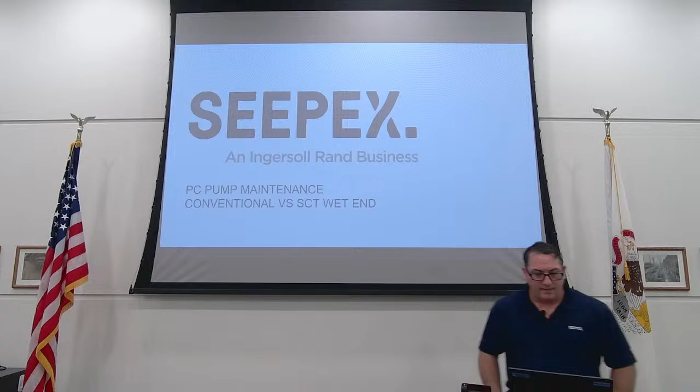So here in the municipal world, what we're going to talk about is PC pump maintenance and some of the maintain-in-place options that are available, some of the new technologies available, specifically regarding the SEEPEX variant. There are several manufacturers out there, but I'm going to go over this SCT model here and give you the differences on a conventional PC pump and the SCT, or smart conveying technology.

Quick show of hands before we get started. Is anybody familiar with progressive cavity style pumps at all, or have any at their plant? Cool, got plans, okay. Just curious. Nice.

So again, we're basically going to go through the PC pump. The pump has a driver or a motor, some means of operating the wet end of the pump. Believe it or not, that can be a gasoline engine, but more commonly and most frequently here in the municipal world, it's going to be a 460, 480 volt motor, three-phase motor, all the way down to a little DC brushed motor, say on a polymer makedown unit.

First and foremost, when you receive a piece of equipment, you're going to familiarize yourself with the O&M manual, specifically the maintenance and lubrication schedules. This is an example here of one of those schedules.

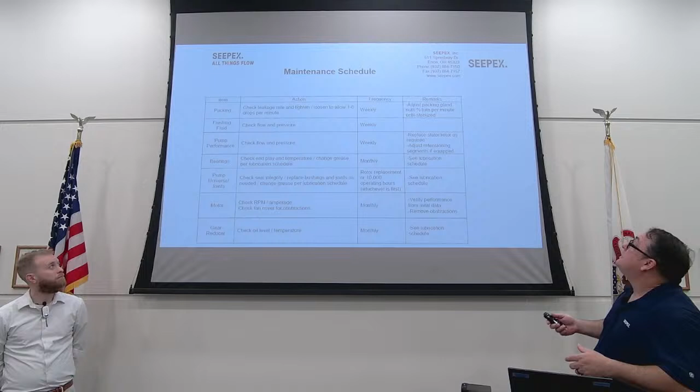Packing is actually designed to drip 1 to 3 times per minute. Otherwise, the shaft is not being lubricated. So if we go and crank the packing down, even on a vertical turbine, to where it doesn't leak at all, depending on the head and the pressure, we may be submitting that shaft to forces like a brake pad, and it's eventually going to wear or polish the shaft beyond reasonable means. There'll be a test on this at the end as well, so make sure you study this.

So, flushing fluid - you may have a plan 53A or B. You may have some type of flush plan on your mechanical seal. On these PC pumps, we use a single mechanical GA seal 90% of the time. We do offer back-to-back, different seal arrangements, different pressures, designed for different viscosities. And you may have a quench fluid to keep those seal faces cool.

For example, if you're pumping something like sodium hypochlorite, 12.5% bleach, you may want to make sure the backside, that stationary seal, is wetted with a quench just to keep it cool during operation. So that quench fluid, whatever it may be, you may need to check the fluid level weekly.

Pump performance: check flow and pressure weekly, replace stator and rotor as required, adjust retensioning segments if required or equipped. Now, this is where we're going to get into the differences between the conventional stator and an adjustable or maintain-in-place, repair-in-place type stator. So keep in mind those can be a little bit different.

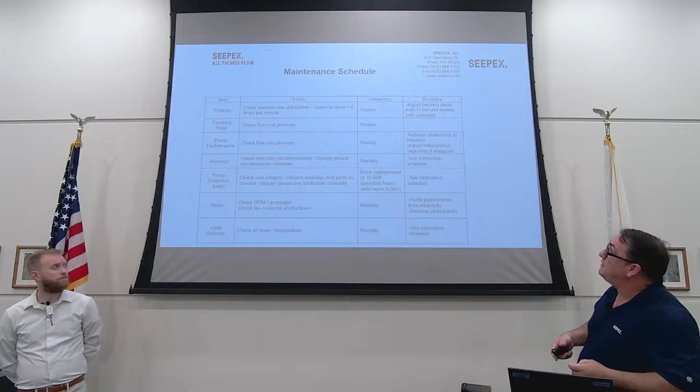Bearings: you may have an NS style pump where you have a coupling in between. It's not close coupled, so it does require alignment, and you're going to have additional bearings for that. If you have a close coupled unit, there's going to be bearings in the electrical motor, inner and outer normally, and a few bearing sets or races inside the gearbox. Other than that, there are no ancillary bearings or bearing frames. That's one of the benefits about the close coupled design—it is what it is, right?

So it could be a C-face flange to flange, and then wet end flange to flange off of the suction casing. So there's no alignment required. You can just drop the pump in place and fire it up.

Universal joints—there's different designs and styles. Most frequently, the cardan joint or pin joint is going to be used. I've seen gear joints, heavy duty cardan, double cardan, such as on a PTO or something like that, or a CV type joint. So we use a standard pin joint, and it should operate the life of the pump. I'm going to get into why we don't break into the joints with this type of technology, because you could be possibly opening yourself up to failure if the joint is not rebuilt correctly.

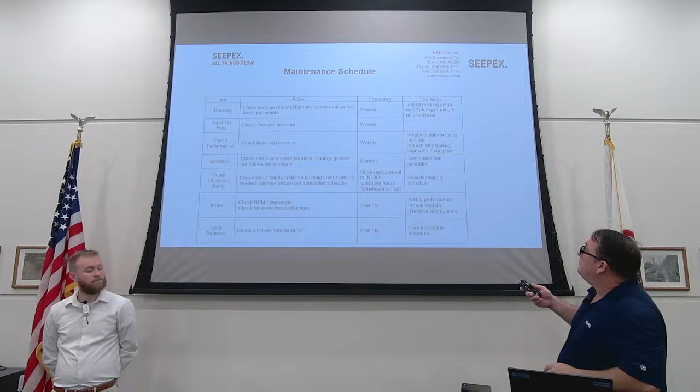So we're just going to say 10,000 hours. We can even warranty that, because as long as the pump's not cavitating, the joint should last the lifetime of the pump. We'll take this apart here shortly and pass it around to show you guys the ease of maintenance. That's the main key of this specific product here, as opposed to having to pull it out horizontally with similar products.

This one you actually bolt apart here and it comes apart this way, so it's a lot easier to work on things. You've got a lot more space. If the engineer didn't design for space in the room you're working in, you don't have to worry about being stuck in a corner or something crazy like that. So you'll see once we get to that point.

Last two here: motor—check RPM, amperage, fan covers for obstructions. That's normal stuff. I get a lot of technical questions from engineers and operators, and they ask how slow can I run this pump. Generally speaking, me being an electrician in a past life, as long as we're running the motor fast enough that the coupled fan can cool the motor—which is generally a 10-to-1 turn down, 60 hertz to 6 hertz—we're fine. If we run below 6 hertz, we may need an externally powered or water cooled jacket on the electric motor. So that's just something to keep in mind there.

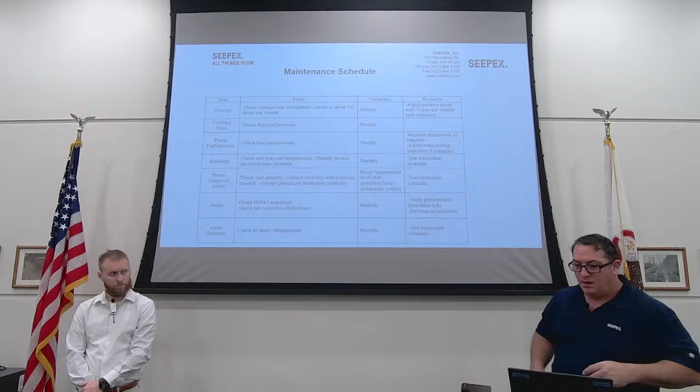When it comes to RPM, one of the inherent features of this pump is the flow curve, which I'll get into here in the next slide or two. If we have a linear flow curve, depending on the head, compared to say a centrifugal pump where that curve just kind of falls off as more pressure is on the discharge side, it's kind of hard to figure out what the flow is without a flow meter. But with this type of technology, if we know the motor RPM and we know the gear ratio, we're going to know within 1% how many gallons a minute, how many gallons per hour that we're actually flowing.

So that is one of the nice features of this technology, this PC pump, conventional or maintain-in-place—they say all PC pumps are metering pumps. That's simply because we know what it's going to flow. It's going to be on that curve no matter what, right? Unless it's totally worn out. So we give it 5% here and there, generally speaking, but it's going to be right on that curve.

So, 100 gallons a minute at 1800 RPM. If we know we're running at, let's say, 30 hertz, 900 RPM, what's our flow? It's going to be half of that, right? So 50 gallons a minute.

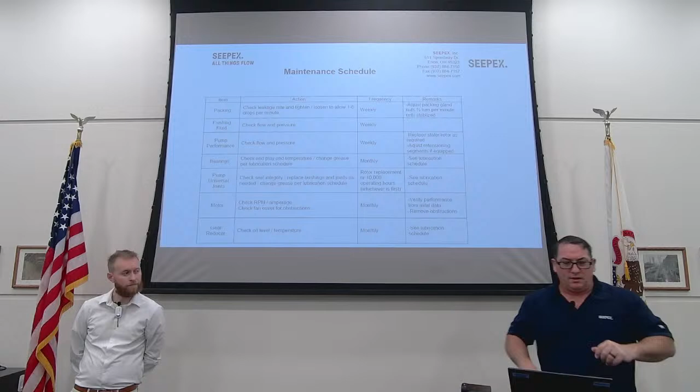You could put a reflective piece of tape on the plug-in shaft where the packing and mechanical seal is, get an IR RPM gauge, and check the RPM. If the pump's running 150 RPM, we should know exactly what we're going to flow. That's one of the nice features, especially if we're feeding chemical, feeding a belt press, and we can pump the cake on the other side too. It's good to know that.

Last but not least, one of the most important things, really the only thing that gets put on the list at least annually, is check the gearbox oil. There's really not a whole lot of maintenance involved with the PC pump, and we've even made it easier with this piece of equipment here. It's the only adjustable pump on the market. But check gearbox oil, check your amperage, check your load, check your flow.

You may have different capacities even though the gearbox is exactly the same. I'm going to get into that right here, it's pretty important. Once we open this up, you'll see how simple this is. It's literally a rotor that's going to rotate on a stator, and as it rotates, it forces the liquid to take the path of least resistance, so it only has one way to go. When we open it up, it'll make a lot more sense.

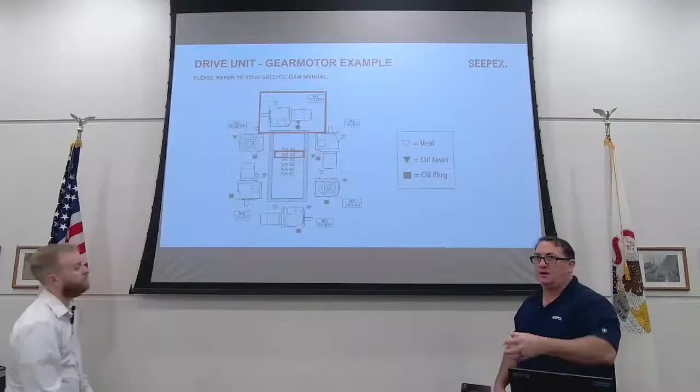You'll see it's literally just a helix that's rotating in like this, making it so the liquid has to go in one direction. It actually gets pulled into one of the cavities, and then it pushes it out the other side of the pump. So we can pump whole strawberries with that technology and not damage them. It's great for polymer, a lot of industrial applications. We use it like soap facilities, for example. Anything that's really viscous or thick, it's specifically made for these kind of applications.

So standard configuration here: we've got a vent on top of the gearbox, that's M1, and then we have a drain. So oil plug, vent, oil level. Notice your oil capacity on this M1 is going to be less than half of the case, right? So if we invert that, say M4, because this pump can run forward or reverse, it can be mounted on the wall vertically or horizontally. It comes with a base plate standard, you can just drop it on the floor and anchor it to the floor. But the PC pump doesn't care how it's orientated.

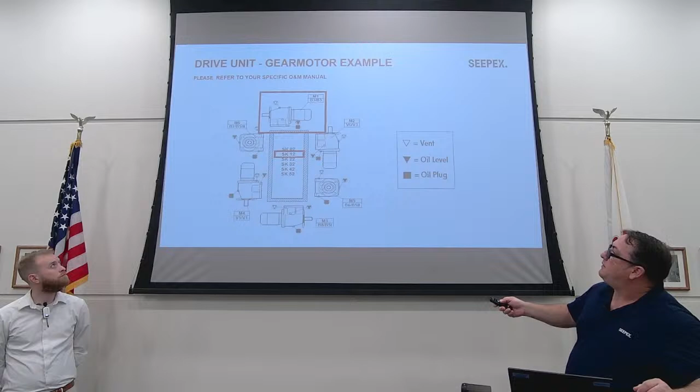We make skids that go onto the walls or whatever, so maybe the gearbox is in M4. Now the vent is going to be moved to the top, and instead of using half, we're going to need enough oil to come all the way up to here, so basically we're trying to wet that ring gear. Everybody has an idea, especially the car guys in here, the ring gear has to be wetted. So as long as we get the pinion and the ring gear, we're good. Now if the pinion is this way, we've got to bring that capacity up to wet those gears there.

What Jason's getting at here is we can configure it basically any way you want. If you've got an existing setup that's goofy and for whatever reason you want to mimic that again, we have no issue configuring it however you would like it to be set up. It's all about how the customer wants it at the end of the day. That's what Jason's trying to show here.

So overall, grease the motor bearings if applicable, replace the gearbox oil, maybe even take samples of gearbox oil every 3 years or every 6,000 hours. Check shaft runout - does everybody know what that means? Basically you have the drive end, then you have the sealing, they call it the lantern or the coupling, and then we have the wet end. The wet end of the pump does the work.

Where the mechanical seal is placed or the packing is on the plug-in shaft, you may have to put a dial indicator on there, and just make sure that shaft doesn't have a lot of play, because especially with the mechanical seal, we want to keep them pretty concentric. We'll allow maybe 0.003 on the indicator for runout - anything beyond that, you're out of tolerance. So we want to make sure we're within tolerance there.

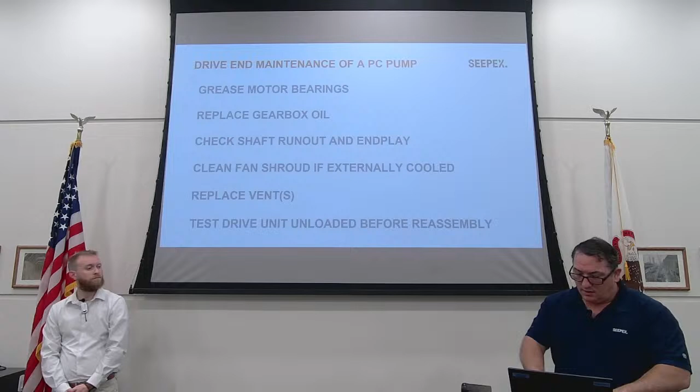Check shaft run out and clean the fan shroud. Obviously, if it's packed with trash, fibers, whatever is flying around, the motor can't be efficiently cooled.

Replace the vents. We saw the vents on the gearbox. It's basically a little check valve, a ball check with a spring. Believe it or not, if you haven't run the pump more than its rated capacity, the gear oil never really gets warm, and the ball check will actually stick. So when we change our oil, let's at least check the vent or replace it.

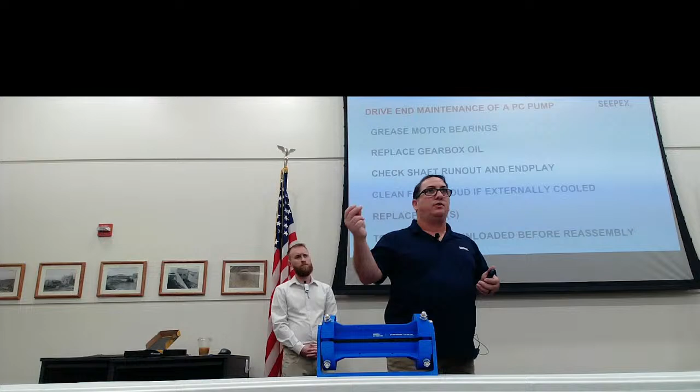So to mitigate that, we have several different options. We can connect this to SCADA. We can look at a downstream flow meter, turn it on - if we don't see flow in, say, 5 seconds, we shut it off. If we're doing a suction lift, how long does it take to pull, say, 28 feet? Let's give it 20 seconds or 40 seconds. If we don't see flow in 40 seconds, we shut it off. So that's one way to do it.

However, flow meters are very expensive, and some plants don't have it in the budget. And why do you need a flow meter for a WAS or TWAS pump, right? So what we'll do is, for an adder, we'll drill and put a PT100, or a simple 2-wire or 3-wire or 4-to-20 sensor, NTC, and we'll measure some temperature.

So we'll take a delta - we'll say ambient temperature today is 60. What's the hottest it's ever been in Peoria? Say 110. Okay, so we know the elastomer melts at 270, so let's set it about 150. So when this comes up to about 150, it shuts off. It basically just has a little contact - you can bring that right back to the variable frequency drive, or back to SCADA for an alarm. So there's different ways to mitigate the run dry.

There's best practices that also need to be followed. Like we don't want to lift aqueous ammonia, sodium hypochlorite, something that off gases. But yeah, if you're just using this for a sludge pump, centrifuge feed, or belt press feed, it's a good technology for that. And it's flooded suction, so we wouldn't have to worry about that.

Now, if we're pulling a digester down every couple of years to clean it out, we need to be aware that once it gets down to a certain level, let's keep an eye on it. I've even seen the plant do this, giant pump, keep his hand on it. It starts feeling warm, shut it off. So yeah, good point.

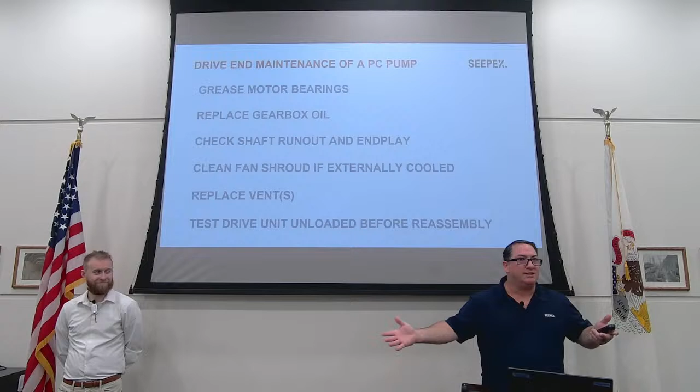Yeah, I worked for City of Westminster in Colorado. Started out as a utility, digging ditches. Went over to the raw water side and made it to plant electrician, which is city electrician basically. Anything that the utility didn't cover, we covered, 4160 and below, which included generator checks, plant upgrades, MCC upgrades. We went from radio to fiber, I was involved in that. Went over to the wastewater side after that. Got to learn about PC pumps, belt presses, and the bugs and all the chemistry on that side of it. So yeah, I've got a little bit of a diverse background. Started out in plastics, but we can talk about that some other day.

But no, this is great stuff, and it's very important. So until 2000, 2001, when I got into water and wastewater, I was in plastics. It was a fun job, but it wasn't important. Water is very, very important, right? So that makes you want to get up in the morning and go do a great job because people depend on you.

Gets me excited. So here's the internal workings of a standard PC pump, not just this brand, but it's pretty common across all brands. You've got a drive, there is no motor here, but you do have a gearbox. There's a splash ring as we work forward. Basically, if this wetted area packing gives out, it's not going to spray into that lip seal, and that helps mitigate damage if there was a failure.

So we've got our drive end, we've got our coupling, which SEEPEX calls the lantern, and that houses the seal, mechanical seal, packing, whatever it may be. This is not an NS pump, it's direct coupled, so this is coupled to here, and the casing is coupled directly to the wet end. In the casing area, again, this can be influent or effluent, suction, discharge. The pump can run either way.

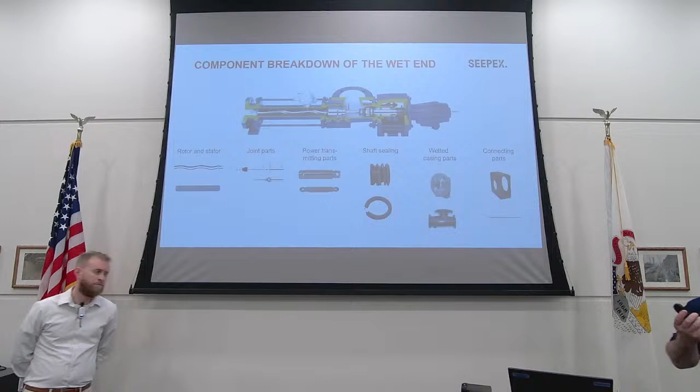There are so many different configurations, that's why you can't just call us, or even another manufacturer, and say I need this size, because we pump everything. Yogurt, water, crude oil, chickens, you name it, we pump it. So this can be stainless steel, it may be ductile, it may be API, it may be all poly, maybe all plastic, I've seen that. Stators, I've seen solid stainless steel stators, no elastomer at all, pumping peanut butter. So ductile, Viton, the list goes on and on.

Paint configurations, macropoxies, it goes on and on because it's made for a certain environment. So municipal, and this side of the world, it's pretty awesome, right? Because we only have a couple things. When we pump ferric, that's going to be a pretty good one, we're going to make sure our materials are correct. But sludge, overall, polymer, piece of cake.

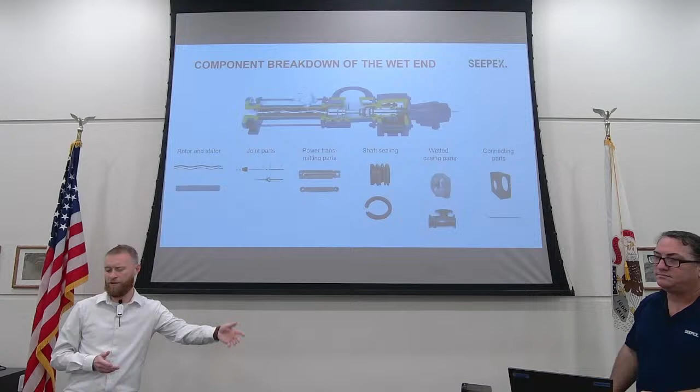Yeah, this thing excels very highly in the municipal wastewater market because the other stuff that it's meant to pump is, how do I say it, the stuff it's doing in the municipal wastewater world is peanuts, no pun intended, nowhere near compared to the aggressive stuff it's doing on the industrial side. This thing works really well. Like I was talking about earlier, it's a very complex unit, but it's a very simple setup.

This is the rotor I was talking about, and all it does is rotate on that rubber part. As it rotates, it forces the liquid the way it has to go. All these parts here, that's it.

There's no crazy hidden parts, very simple. Just to allude to where we're getting into, we're building it up, letting everybody know there's different pump configurations and different applications for these pumps. You see the construction of this pump, it has some tie rods, and then we have a solid stator here. It's basically a pipe tube, knurled, machined edges, and elastomer that has been bonded or extruded to the inside of it.

We'll change the camera here in a second, but there is a rotor and stator, both sides there.

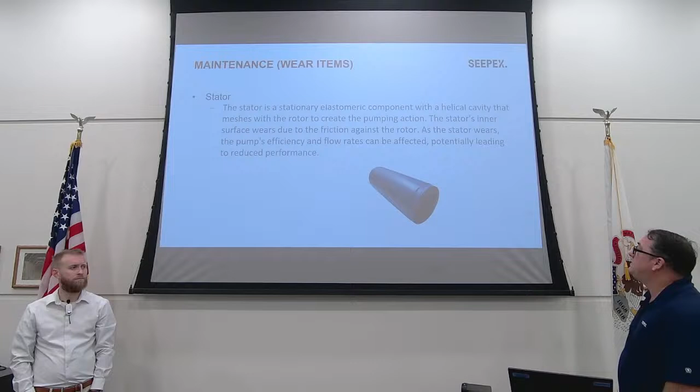So next, just going into this, if this piece fails, it's pretty heavy, it's kind of expensive. It can't necessarily be recycled, because it's a piece of steel, and you got to get the rubber out of it. So there's some things to think about when we talk about the stator.

Rotors, if you do have a catastrophic failure, one thing that I don't think a lot of plants know about is we can send you an entire assembled unit. Say there was a construction project, they dumped a bunch of concrete down the hopper or whatever it may be, and it tore the pump up. We'll work with you and pre-assemble what we can so you can drop it in place, within a half hour to an hour, and be back up and running.

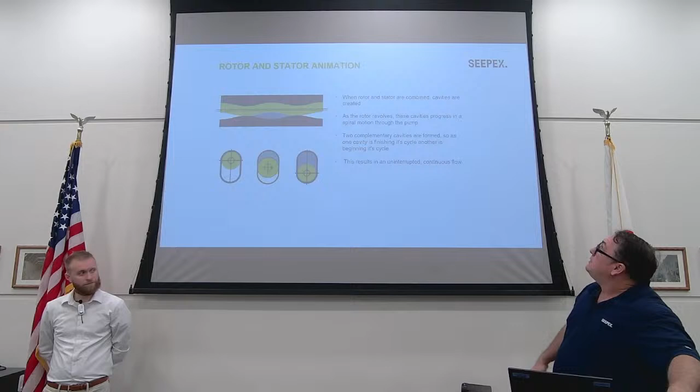So rotor stator geometry and animation. I like animations, I put a couple in here. It helps me relay the message of what is happening inside this pump. As one cavity is opening, the other one is closing, so that provides laminar flow. We don't need any check valves per se, or pulsation dampeners.

So a little micrometering pump that microdoses, there's different technologies, maybe a hose pump or something. If something happens with that, what happens to the chemical? It could fall on the floor because the hose leaks, and then you have these check valves and all this other stuff. This pump will pump laminar, pulsation free to an extent, 2,200 gallons a minute down to 0.53 gallons per hour, up to 700 psi. So there's some good applications.

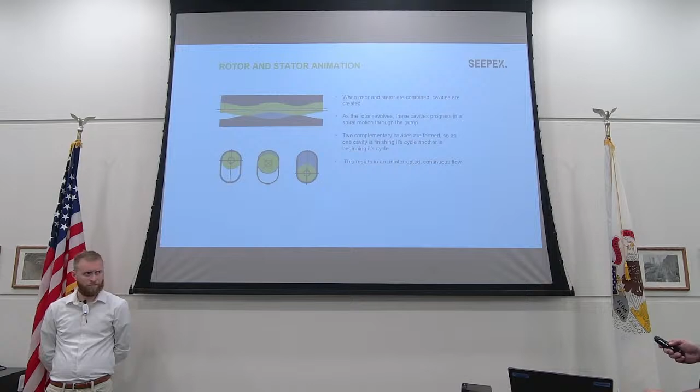Uninterrupted continuous flow here, single helix rotor, double helix stator. There's our cavity, and as it turns, that cavity will actually stay open throughout this 360-degree rotation.

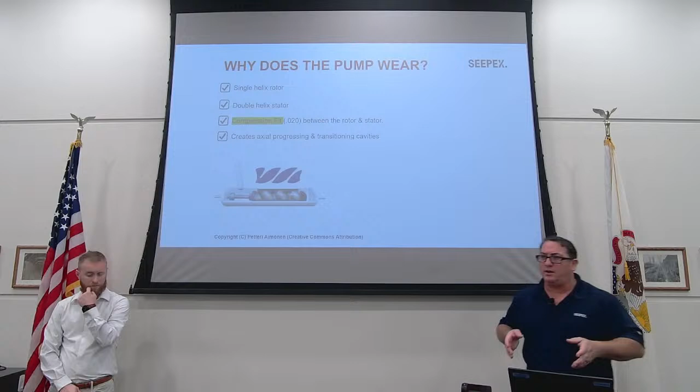Compression fit. We require slightly higher torque to get our pump up and running because we use a tighter fit. So if you take one PC pump that has a 7.5 horsepower motor, we're recommending a 10 horsepower motor. One reason is we want enough power, more than enough power. We don't want to be right on the edge, and we don't want VFD problems or tripping breakers.

Another thing is the pumps are a little bit tighter, not by much, 20 thousandths rotor to stator, generally speaking 15, 18. So 3 to 5 thousandths tighter, but our pump will last much longer now that we made it a little bit tighter. And we can handle higher pressures with less stages. That is a single stage pump, stages meaning a full set of cavities, centrifugally speaking, if you put them all together.

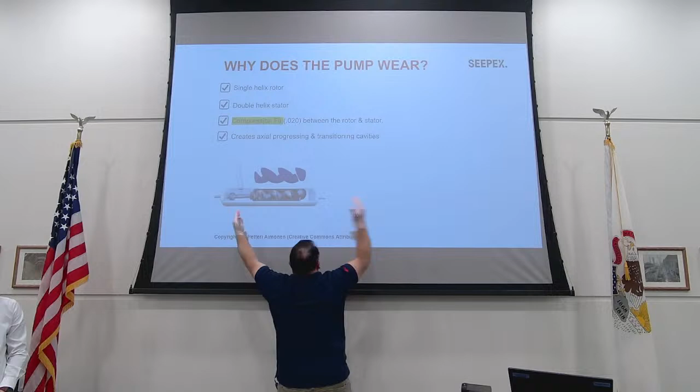Single stage may be this much and it's good for 80 psi or 100 psi. Two stage, you just make it longer, so now you have twice as many sealing lines that can hold that pressure back.

I think what we'll do... jumping jacks? It is Friday. We'll look at this piece here and talk about the difference between the standard and the conventional. I think I'm jumping ahead of myself here real quick.

So we talked about seals, here we go. Conventional pump maintenance: the conventional pump requires a suction discharge pipework to be removed. If this is down in a pit, that can be a pain. Maybe you only have one maintenance guy today and this pump wore out and it can't wait till tomorrow. One guy is going to have to disconnect all this pipe work, and that can be heavy. It's going to take some time. It's an arduous job, could take a couple hours or a couple days.

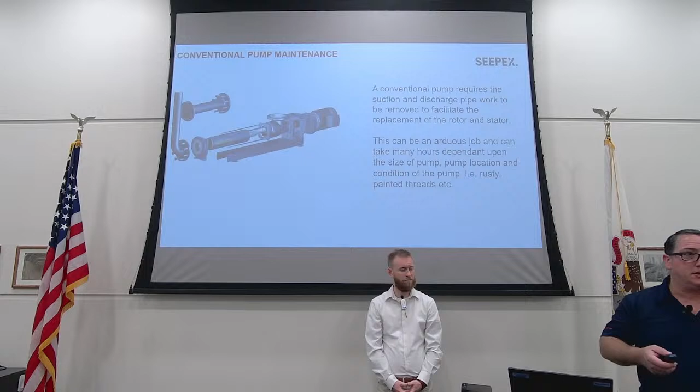This pump I can rebuild in under an hour, any size, one guy. And just for the stator, without pulling a snap ring to get the rotor out, all I need is an adjustable wrench. That's pretty cool. I don't have to disconnect any pipe work.

Jason actually drove up a couple months ago from Ohio and helped me install a pump along I-80 in Oglesby in under 3 hours. Took the old pump out, put the new pump in, up and running. Entire pump replacement in 3 hours. And me and him, I'm not a technician, as you guys can tell. He knows a thing or two about it, but if we could figure it out that quick, you guys can probably do it a lot faster than we can.

So something to think about: this is an adjustable PC pump. There are other technologies out there where you take a spacer out, or you have multiple bolts and stuff. This thing can be adjusted on the fly.

So if we look up and we're at 68 gallons a minute and we need to be at 75 or 85 gallons a minute, basically you're going to go flat. Make sure we go flat all the way around and watch that flow meter come right back up. Now, if you got a younger guy and he's real go-getter, and he's out there with the ratcheting wrench, he's got the big 24 inch and he's tightening that sucker down, you'll see the flow go up and then the flow starts to come back down. Why is that? Any guesses?

It could possibly slow the rotation. Say we got a 25 horsepower motor with a 16:1 ratio, right? There you go. So the cavities inside the pump...

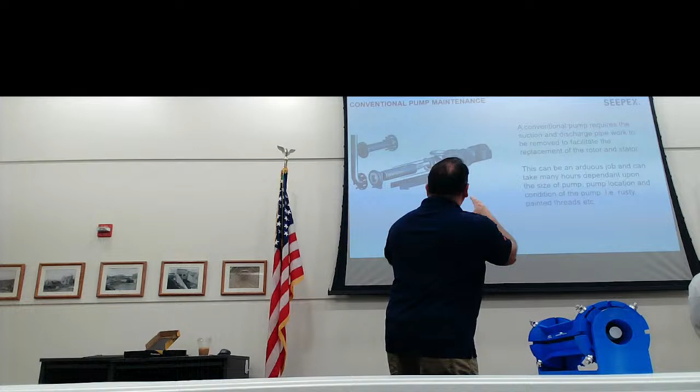I'm gonna break this open for you real quick. We said we can guarantee flow within about 1%. That's pretty good. So this can actually be over tightened.

And that's why one of the things that we want to do when we start up and commission our brand new SCT pump is take amp draw on the motor, make sure that we got a baseline, kind of figure out flow. So these, you keep these for the life of the pump. They don't go anywhere.

This is the only part that needs to be replaced. This part can be thrown in the landfill or it can be recycled. I highly recommend we recycle it. This part is a third the weight of a big stator, just no steel, right? So one guy can carry a big stator around downstairs and swap them out.

So there's your cavities. And as we compress, those cavity sizes are lower or diminished. So now we can't convey as much. So what do we do if we over tighten it? We could probably speed it up to get our flow, but basically we just over tightened it.

So how do we know? Well, it's not rocket science. So this right here can be tightened down. This is my 3D printed model here. You see how this is sitting flush? That means I'm out of adjustment. I probably want to order some parts because I've only got a couple weeks, couple months, couple years, and it's no good.

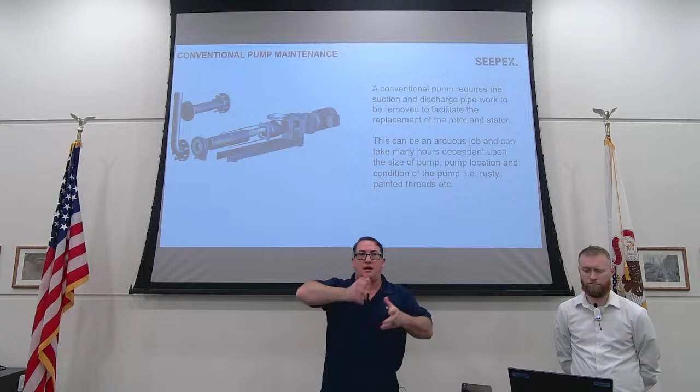You can flip the stators either way, you can gain more life that way. If you saw cavitation or dry running, that's going to happen on the influent side. That's where we're going to run out of material first. So yeah, flip that around. There you go, you get your flow back, at least enough to make it through. So yeah, it's pretty cool.

Technology is evolving, you'll see different manufacturers. We've all got a maintain-or-repair-in-place technology. I'm a big fan of it. I just want everybody to know about it.

If you do have rotary lobes or other technologies out there, and maybe you've got a poor primary side of the plant, getting a lot of hair, a lot of fibers wrapped around those mechanical seals, or you're just tired of working on them, there are other technologies out there, right? Yep.

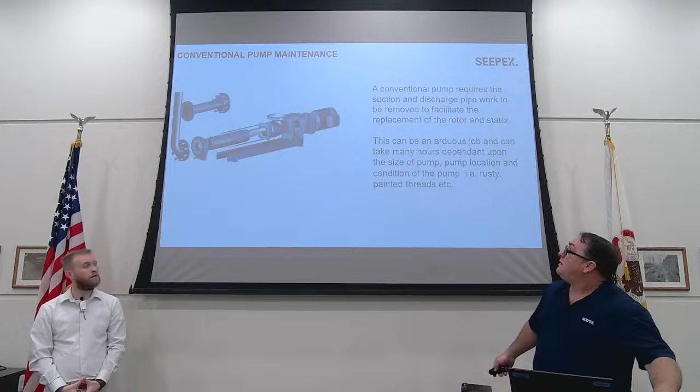Okay. Oh, so maybe we should trim that every once in a while. You could trim a lot of things.

So I helped a lot of the geeks out on the SCADA side, so you can trend the 4 to 20 part of it. I mean, you know. Why are you calling me that? I'm right here. So we used to call them, so all of us outsiders, we were W, or Whiskey 1, Whiskey 3, and all our SCADA guys were Geek 1, Geek 2, Geek 3. So just an inside thing.

So yeah, you can trend. So in short, when should you adjust it? So a VFD is going to be programmed to a maximum, right? 60 hertz, 70 hertz, maybe even 90 hertz. Some of these premium efficiency motors are designed for almost 4,000 RPM. They're designed for a VFD to run at 90 hertz, right? There's a whole explanation, I can explain all that stuff at a different time.

So yeah, if we know this pump has been running, or it takes 6 hours to transfer, or yeah, I've never heard the pump run like that. Do-do-do-do-do-do, it's usually nice and quiet, and do-do-do-do, so I guess it's up to each plant and each application.

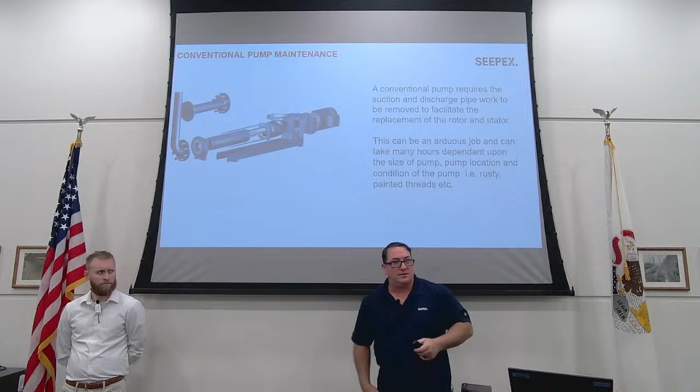And I would say also, if you're noticing it's doing the same flow, but it's consistently running at higher hertz now, the trend will probably tell you something as well, right? So trend the hertz, or the frequency, the 4 to 20 signal, the flow.

Yeah, sound, yeah, I mean there's several different things you could trend. I mean you could even trend the RPM on a VFD, get the feedback off of an analog output and get the RPM. It may say 1750, and oh, we've never seen it run over 900, and now it's running at 1235 or something. So yeah, it's pretty cool stuff out there.

Some flow meters, and even overpressure devices such as Ashcroft and Onyx, and isolation rings and stuff, they have built-in technologies as well. But I'm probably going off on a tangent.

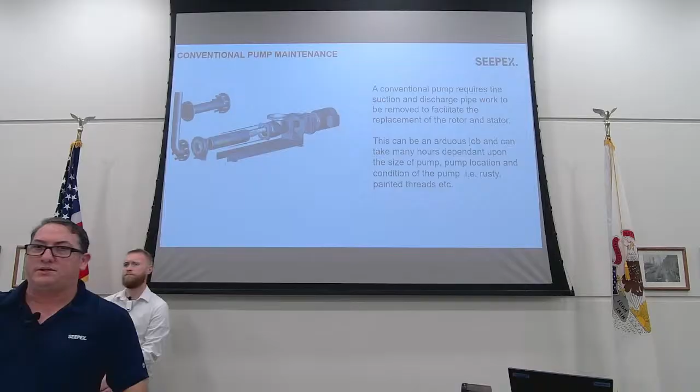Yes sir, so I guess the way this looks, you can do all that maintenance without having to remove it. Absolutely. So that pump right there, those two end adapters or casings, one would be a pressure branch and one would be a suction branch. Those don't move. The only thing we have to really touch or adjust is these 4 segments, the 2 halves, and the hardware.

So yeah, the rest of that part of the pump is maintenance free. The question was if you can replace the stator portion at the plant, or if you have to take it out and do the work elsewhere. When we did the replacement in Oglesby, we did all the work right there on the shop floor, right where the pump was installed. There were 2 pumps there, and we were able to do all the work in that little corner. So you can do just about anything until you get into the bigger units, depending on what needs to be done.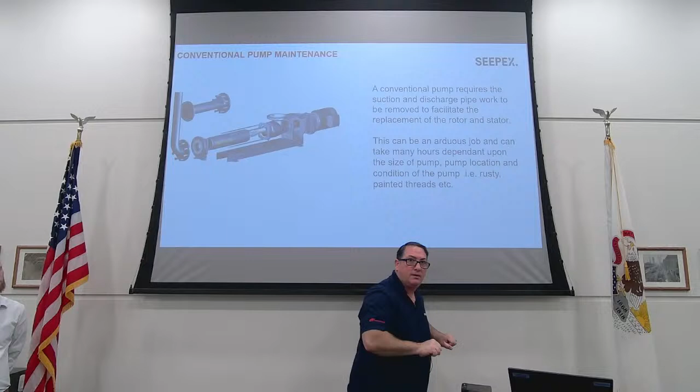Traditionally, if that stator is 30 inches long, you're gonna need 30 inches to get that off the rotor, right? With this technology, you don't need that length. It basically comes apart as an exploded view, so working around that piece of machinery, you only need enough room to remove the segment. No longer do you need a cheater bar and some of these other tools to work on the older conventional style PC pump. Depending on your safety protocol, it might require certain tools. Everybody's different, but for the most part, everything can be done right then and there. Just depends on whether you can pick up a certain amount of weight, right? Yep, so it just all depends. Yeah, ergonomics, that's a good point.

A lot of plants don't want an operator lifting more than 50 pounds, or even a maintenance guy more than 75 pounds. A big stator, 300, 500, 800 gallons a minute, you're not gonna be able to pick that up. With the new technology, a 500 gallon a minute stator half is 38 pounds, and it's a good size. It's just a piece of Buna or Viton, just depends. But about 40 pounds, that's pretty nice.

Good question, though. I have a question. So at our plant, we have a Netzsch. We ran it with a valve closed, so it broke. But it would pump for a while, though the volume went down. Sure, so I still don't... if you were running that pump and had a valve closed, it sucked on the feed side. What are you gonna damage on this?

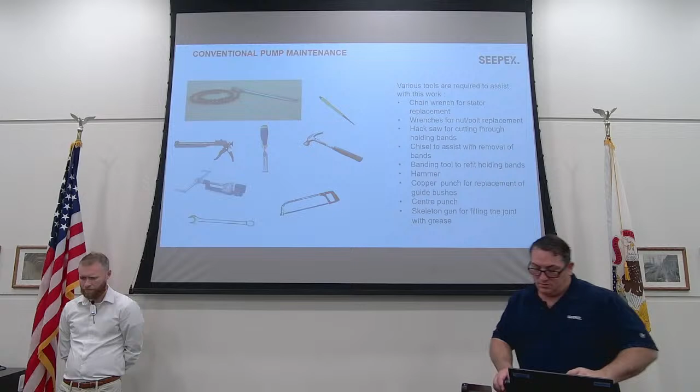You could possibly damage something with this pump, but part of the whole commissioning is that a lot of our guys are electrically inclined. We'll program the VFD or set the heaters in the soft starter right at NEC level. So we're not going to throw 50 amps at a 20 amp motor, right? So when I start that pump up, I highly recommend that once you get this pump repaired, make sure it will shut down on overcurrent or inrush spike. That will actually catch it, if this pump's designed for 200 PSI and it hits 350 PSI, I guarantee your amperage on the driver or motor starter is going up. So there's a correlation for that torque, it's going to show up in horsepower or amps, right? So that's the first thing that I would do.

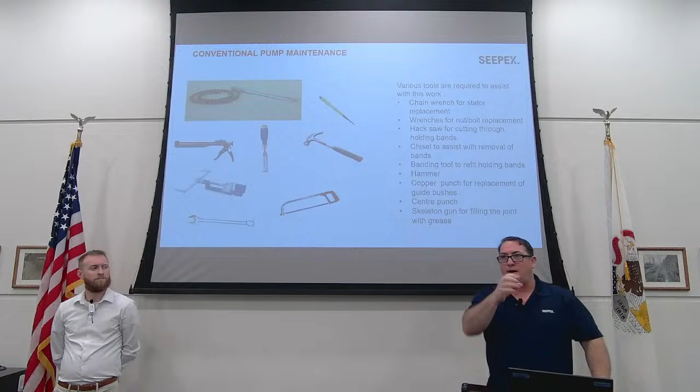Will this one handle more pressure, higher capabilities? Yes. I don't know if I have a picture, but does the Netzsch have a maintain-in-place design? I don't know. Okay, so Netzsch has an FSIP type pump, but it uses a 2-piece coupling rod with an Allen bolt. So essentially they've taken my part and made it this big, so it probably snapped or bound up, or something happened, right? Mine is full size - all I did was slide a snap ring over it. So nothing in this pump was cut in half other than the stators. We don't sacrifice strength and durability for ease of maintenance like some other manufacturers do, if that answers your question.

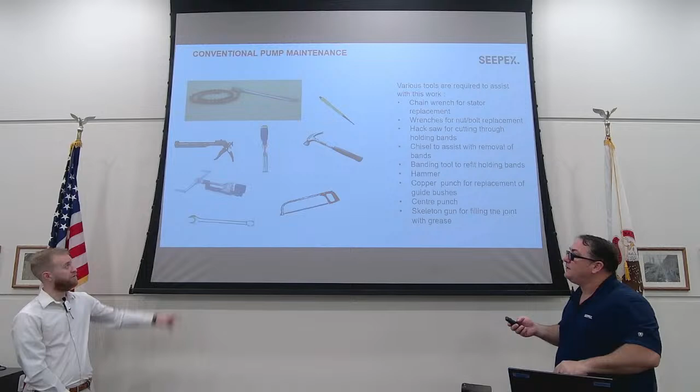You can get most of these tools from NAPA as well. That's why I recommend going with this setup. So yeah, it can be a pain.

I'm just going to step back here. You can see you're going to need a lifting apparatus depending on the size of the pump. I'm not going to go into depth of this whole thing, but you have to slide this off - oh my gosh, it could take a forklift, it could take a giant come along depending on how many stages. It could be a 4-stage, 500 PSI pump. How long is that rotor? Four times, right? So it's going to be a bear to get on and get off.

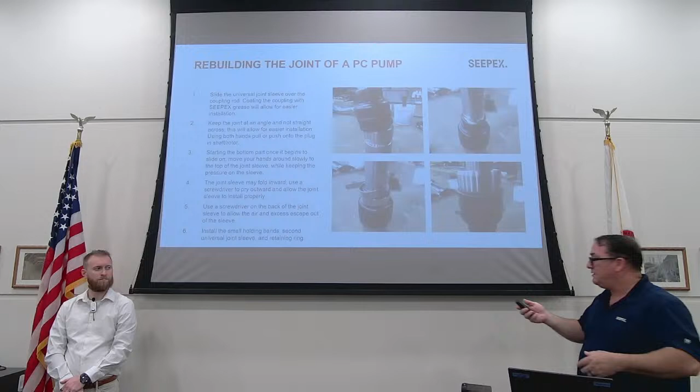Joints, here we go - these are a little complicated. A CV joint in the car, AutoZone doesn't want us rebuilding them. They send you the whole CV joint, and you got to take the whole thing off and put the whole new CV joint, pre-manufactured, pre-assembled, into your car, because it takes a little bit of knowledge and training. Yeah, we can do it - I did it, you guys can do it. But why break into that when you can use that technology if you don't have to? They should last the life of the pump.

So yeah, the joint has to be dismantled. You have to have a means of rebuilding it. It can be a pain.

So the maintain-in-place concept, which we talked about, the model that we're passing around, it's ease of maintenance. We're trying to meet stringent specifications for how much can somebody lift, how much does somebody need to move, or how many operators or maintenance staff does it take to rebuild something. How long does it take to rebuild something? So we're cutting down the time. How much does it cost to rebuild something? We're cutting down how much it costs - not just the return on investment overall, many years and hours to add up.

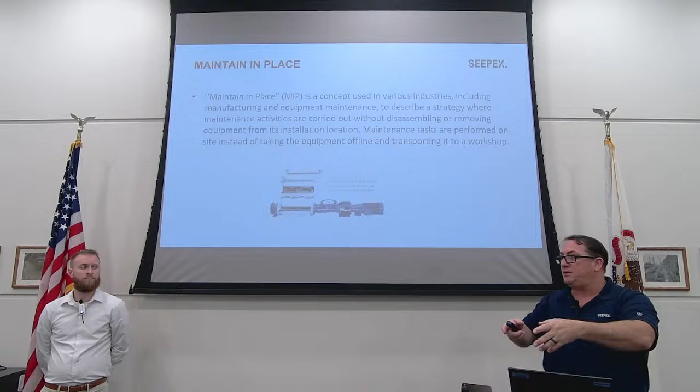We're talking about a two-piece piece of rubber compared to a stator bonded tube, so the cost and all that stuff, the lead time. There are different stages and pressures - 500 and something gallons a minute, single stage is 60, double stage is 120 PSI. So there are limitations to this style.

We have other technologies as well, so definitely reach out if you're looking at something. SCT does not require rebuilding the joints - how important is that? I put it in every slide from now on, again and again and again.

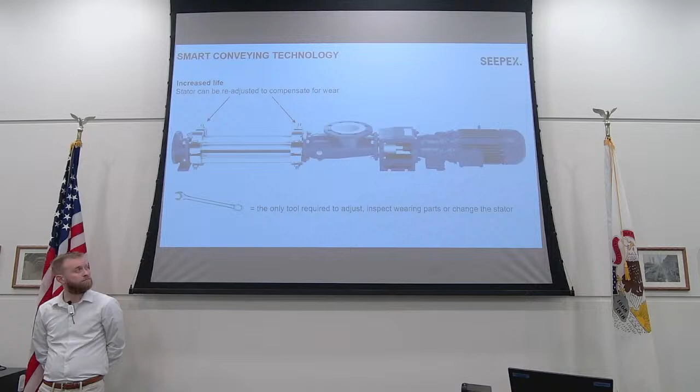Smart conveying technology - if you have ragging issues, open the pump up. It takes seconds. Open the pump up, what's wrong? Nothing wrong in there. Put it back together, it's got to be something else. Pretty cool stuff. It says you need a certain box end wrench - again, send the guy downstairs with an adjustable, he'll be just fine. From NAPA.

Environmentally friendly, less waste produced. Only the stator halves are replaced when worn. Easily recycled. Pretty cool stuff.

I know we talked about a lot here, but this is a very simple unit. It's very complex in the way it operates, but it's very simple at the same time. If you have stuff you're struggling with pumping or other pieces of equipment you're not happy with, this excels in the municipal wastewater market. It really does. And there's several technologies out there - we're not saying this is the one end-all be-all. This is just one of the things that we chose to present on today for you because we love it a lot, and we might be biased a little bit.

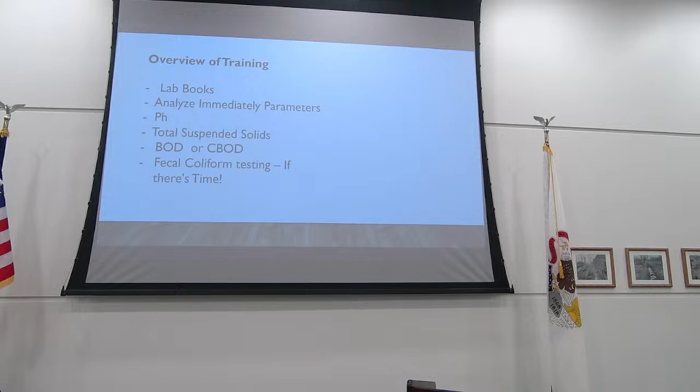There we go. Okay, so you'd be asked to have lab books, or at least prove that your equipment is saving the info that you need to show that you've calibrated, like your pH meters, DO meters, or anything else like that.

So we're going to look at analyze-immediately parameters. If anybody knows what those are, hopefully you do know what those are. If you don't, your next lab audit you'll probably learn what they are. pH we'll go over quickly because pretty much everybody knows how to do pH. The main things we'll really want to hit on are TSS and BOD - those are the major ones I have questions on. We probably won't get to fecal coliforms, but if we do, we'll look at that as well.

So lab books, the big thing is make sure they're solid bound. You don't want your lab books where you can have removable pages, because if I'm coming in there and looking, you could completely remove a page and change that calibration data. So they want to see it as hard bound. You can buy, what we had, like ledger books for keeping, auditing and stuff like that - those are great books for keeping.

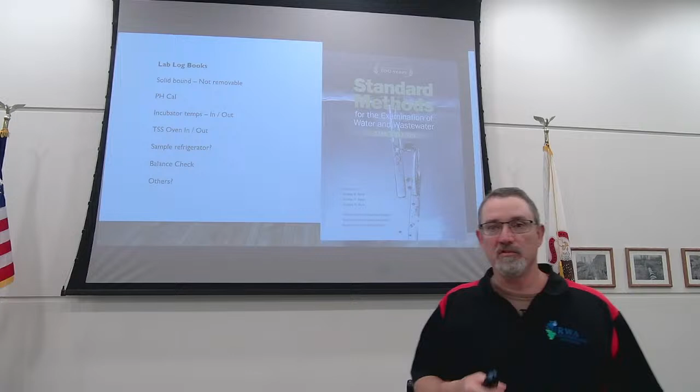For your lab books, some of the items that we'd put in there - when you did a pH calibration, incubator temps for BOD, TSS oven temperatures, sample refrigerator if you're keeping samples for any length of time, your balance check. You should be looking at this when you do TSS - your balance check should have check weights to make sure that your balance is keeping the calibration.

And does anybody have any other things that they keep in their lab book? Those are most of the ones that we did.

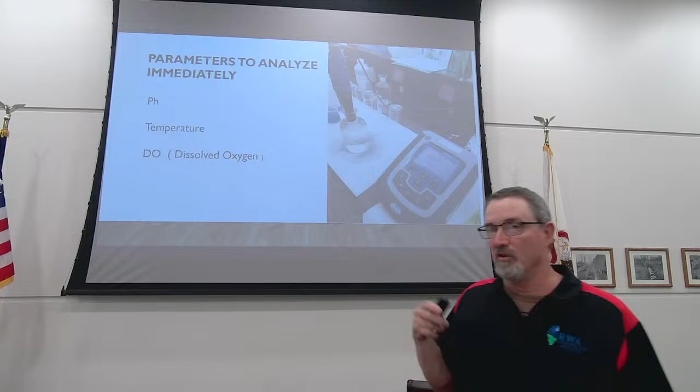So these are your analyze-immediately parameters. Hopefully, if you're from larger labs, you know it goes into more like class 3 or 4 plants where they're shipping all their samples out. What's happening is a lot of the pH and DO are being done by contract labs.

You're really supposed to be analyzing temperature, pH, and DO within 15 minutes. If you're getting a lab or IEPA inspection, most auditors now require at least a DO meter on site to check the DO. Kent and I have seen a ton of violations for DO, and if they had a DO meter on site, it probably would have been avoided.

I just visited a facility yesterday that's under a violation notice for DO, and it was literally that they were taking the sample in the wrong spot. Kent and I have seen that multiple times.

So if we calibrated on 4 and 10, the 7 for our lab was designated as having to be plus or minus 0.05 to be an acceptable calibration. Also, look at the slope on your meter and see what the manufacturer allows for the change in slope. You should be calibrating before each certified reportable number.

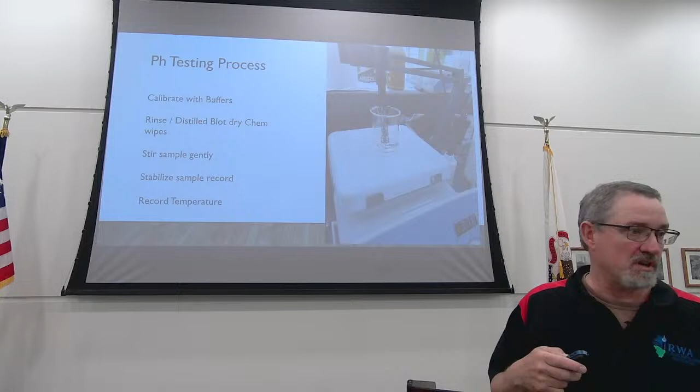I'm not going to go through pH too quickly unless somebody's got a question on pH calibration. I've got a bunch of cards here. If anybody needs help with any of these items, feel free to reach out to Kent or myself, and I can certainly help you with that.

The one thing I'll point out is I've seen a lot of people get all their filters from USA Blue Book, and those filters, in my opinion, are not the best. The way I can tell is a lot of people using them do their blank on the TSS, basically running 60 mLs of distilled water, hopefully at least. They're getting a lot of variation on these filters, and I see a lot of people saying, how am I getting a negative number on that? Those filters are just very flimsy and not well constructed.

They also have what's called a Whatman filter, which is quite a bit better in my opinion. That's the one we used for 35 years in my plant. We didn't get anything from USA Blue Book, we got it all from Fisher Scientific, but it was the same Whatman filters. The Whatman filters are quite a bit better. I don't see nearly the variation on the weights that I do with the Blue Book filters.

So for the weighing balance, obviously we want it to have a hood on it, because air currents can hugely impact results. I had one guy with the same issue, asking why his filters were getting such variation. He had a balance with side sliding doors, and he was keeping those doors open while zeroing his balance. Air currents, and his furnace was kicking on, you could feel the air current in the room fluctuating all over the place. I told him you're supposed to keep those sliding doors closed, which we probably all take for granted.

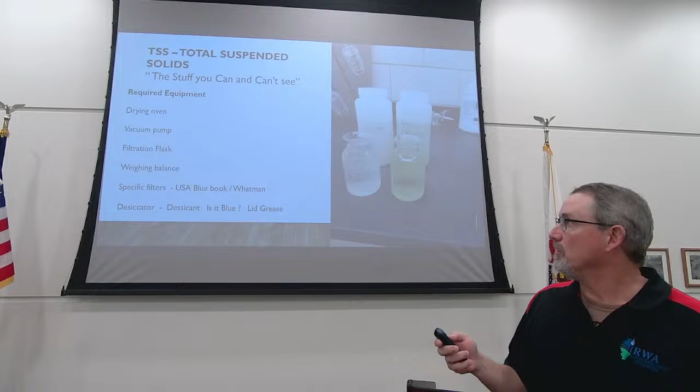Vacuum pump, filtration flask - there's 100 different setups I've seen, especially since I've been out here. The biggest thing with filtration equipment is being able to get a large enough sample through the filter, so there's modifications and all different sizes of filters you can get. There's down to like 25 millimeter filters, 47 millimeter, up to like 120 something, and they can all be used for TSS filtration.

So for procedure, I'm gonna kind of whip through this because I feel like most of you probably know how to do it, since you're here. The one thing I will touch on is sample size. That's one of the things a lot of people err on - especially for effluent, they're using way too small a sample size.

Like what size sample do you guys run for effluent? 100? Yeah, so technically, and we'll get into this in the calculation part, if you're running 100 mLs, the lowest number you can report down to is 10. So you really need to bump that up to, in my opinion, like a 500 ml sample.

So that's just by the way the method is set up, and all this goes back to standard methods. If you want to fall asleep at night, there's a book called Standard Methods for the Examination of Water and Wastewater. Everybody's probably seen that, nobody reads it. All this stuff's in there.

And whenever something comes up, like there was something on BOD I'll touch on, I go to standard methods and say, well, where is it in standard methods? If it isn't in standard methods, then it's up to interpretation of what I feel like we need to do. If it's in standard methods, then it has to be done, okay? Anything outside of standard methods?

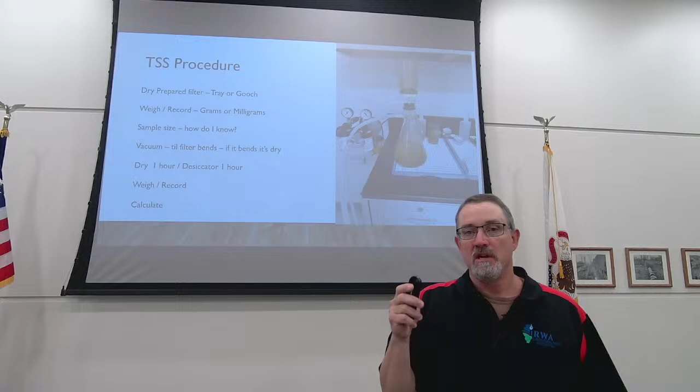Eddie and I were talking about this. In standard methods, you're supposed to get at least 1.0 milligrams of weight. So if you're weighing in grams, it would be 0.0010 weight on that. If you aren't achieving that, then you have to go to what the default is of the multiplier, okay? So if they're using 500 and they don't get 0.0010 residue on there, then they would report that sample as less than 2.0.

And if you look at the results you get from PACE very regularly, BOD - and I'll explain detection limits in BOD and TSS a little more - I very regularly get results from PACE that say for BOD less than 4, or for TSS, less than 4. And we can do the math for both of those.

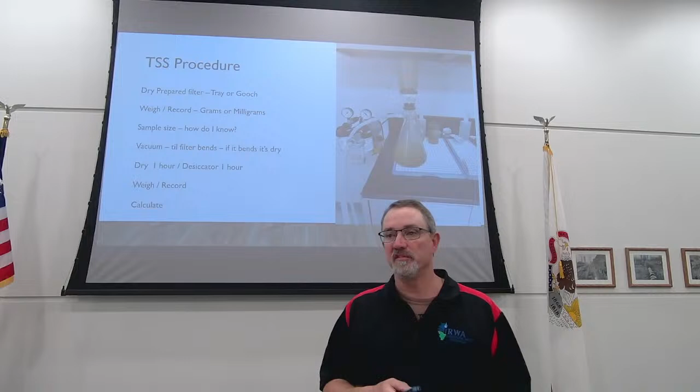But so that's technically how you're supposed to report that, and the majority of labs out here are not doing that. Like I said, the only reason I know this is because we have lab audits every 2 years, and they'd say, well, what's your result? And I'd report 0.5 milligrams there.

Well, you can't do that. Even if you're running 1,000 mLs through the filter and you don't get 1 milligram, you have to report that as less than 1. Nobody's going to run 1,000 mLs probably through a filter, because it's going to take you quite a while, and nobody wants to hold a graduated cylinder that's yay big.

So, anybody else have any questions on that? Because I see that all the time - people are running 100 and they're getting a negative number, and they'd say, well, how can I get a negative number? It's because...

So let me see where we're at here just so I don't jump ahead too much.

Okay, so this is where we're at - determining sample size. Like I said, you want to get at least 0.0010 grams or 1.0 milligrams if you happen to weigh in milligrams, which almost nobody does out here.

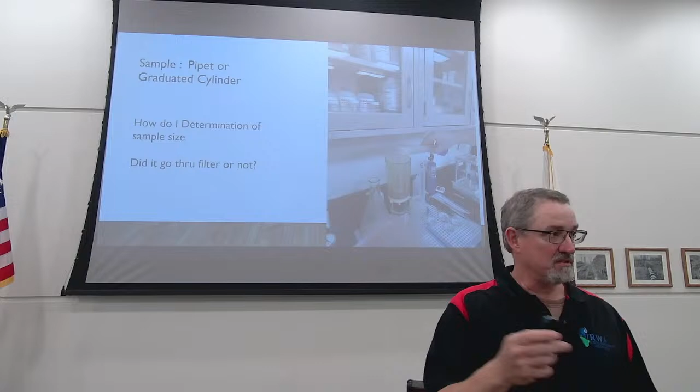So if I'm running 100, the multiplier to get to liters is what? 10, right? 100 times 10 is 1,000. We're weighing in milligrams per liter. So if we use only 100, it's only accurate down to 10 milligrams.

Most people, because they have the 85% removal rule in there, want to get down lower than 10. I would recommend at least getting down to 4. So if we're getting down to 4, we'd be using 250 mLs.

If anybody's confused on this, just slow me down. Ask questions, don't be afraid to ask. Because almost none of the wastewater labs I've seen know anything about detection limits. If you've got questions after this and don't want to slow down the presentation, just talk to me on the side. It's very common.

The way you determine your raw sample size is how long it takes to go through that filtration filter. A very common number is 50 mLs of raw or 25 mLs of raw. Detection limit isn't usually an issue because raw always has over 1 milligram of sample on there. So for raw, I'd say try 25 mLs, and if that goes through quickly, try 50. Anytime you're using more sample and have less of a multiplier, you're going to be more accurate.

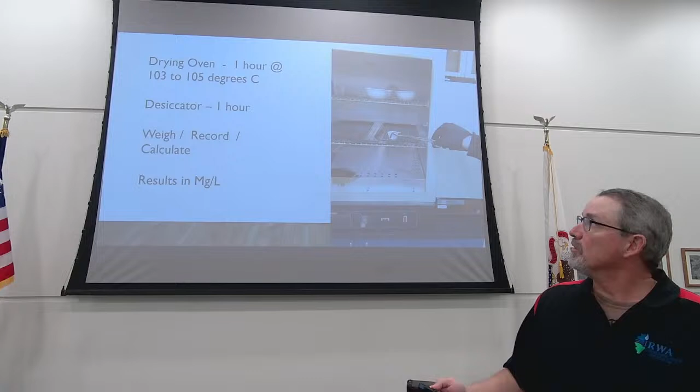I've also seen some interpretation of this out here, and I went to standard methods, and I do not see this: people running their sample in the afternoon, putting it in the oven overnight, drying it, weighing it the next day, and saying that's acceptable. I'm like, where is that in standard methods? Because standard method says dry for 1 hour, put it in the desiccator, let it cool for 1 hour, and if you're technically doing it right, you should repeat that process until you have less than, I forget what the acceptable level is.

Nobody ever does that. Our lab inspector wanted us to at least periodically do that, because she asked about the dry and reweigh cycle, and if you go to standard methods, it's in there.

If your blank sample, which is the 60 mLs of distilled water, is going through there and you're not getting a lot of variation in that filter, then the dry and reweigh, in my opinion, is really splitting hairs. But it wouldn't be a bad idea once in a while to show that you do that.

When our lab inspector asked me to do that, I said, do you really want me to do that? Because you know it's not going to be less than what we said is acceptable, which is 0.0005, or half a milligram change. That's what our lab says is acceptable. When I asked what's the acceptable change, she said you have to determine that yourself, there's no set number. You just have to say all of our samples are normally under an acceptable level, and that's what we decided. In my opinion, 0.0005 is a pretty large amount of change.

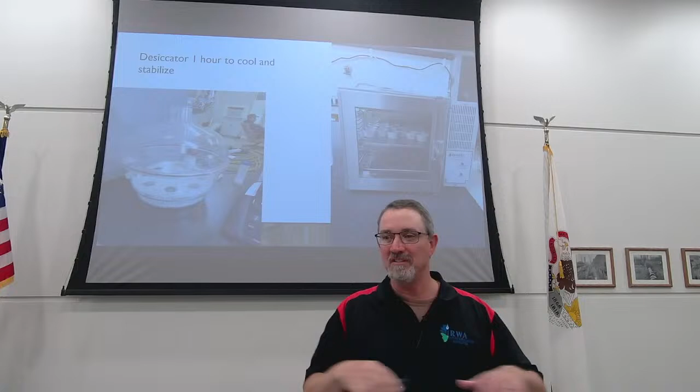There's the desiccator, the number one thing. Anybody that has a lagoon inspection, the first thing the inspector goes out and looks at, are all the banks maintained, are they clean? If I walk into the lab, the first thing I'm going to look at to see how good your lab is, is that desiccant blue? It's the easiest thing to check. If I go in there and see that it's purple, it's spent.

You have to dry it, or get new stuff. If you want to save money, you can dry that desiccant, but it won't come back completely blue. It'll come back some shade of bluish to purple.

What I tell people to do is mix some of the new stuff in there, so it's kind of an indicator if the old stuff is spent. If you have a decent lab budget, just replace it.

If I walked into the lab and that's purple, the first thing right away I'm thinking, well, it just gives me a bad vibe about how you guys are keeping it up, especially if I know there's a lab inspection or somebody coming in to look at my lab. That's the first thing I look at. Because if that desiccant's spent, just the humidity being reabsorbed by that filter and that sample can give you a falsely high number.

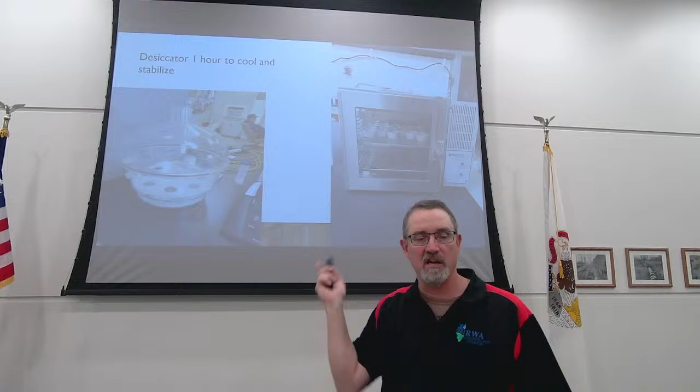I don't know, did you guys have an electric desiccator? Yeah, so they have an electric desiccator, and Tilton has one and Macomb has one. I've never actually used one.

Does yours have like a pillow in there that has an indicator of if it's okay or not? Yeah, I think it's on the side. I couldn't remember if this was yours or if it was Beardstown. Normally they have a little pillow in there that has a blue or purple indicator on there to make sure that's operating properly. I don't know how much they run, but I think it's probably a good idea. Then you don't have to worry about the desiccant.

So, calculation. There's two ways to do this. You can either be in milligrams or you can be in grams. Almost everybody I see out here is in grams. Grams is the way I originally was taught to do the test.

After being an operator for years and years, we switched to milligrams because it was easier for me to explain the test to guys coming in and train them if we were already in milligrams, and all we had to do is convert from milliliters to liters. It was easier, and I felt it's much easier to say 1.00 milligrams than to say 0.0010. Even me trying to say that to you guys is hard to fathom what that number means. So when I say, hey, we've got to have at least 1.0 milligrams of residue to use that as a reportable number, it's a lot easier for you to visualize than 0.0010. That's why I switched to milligrams.

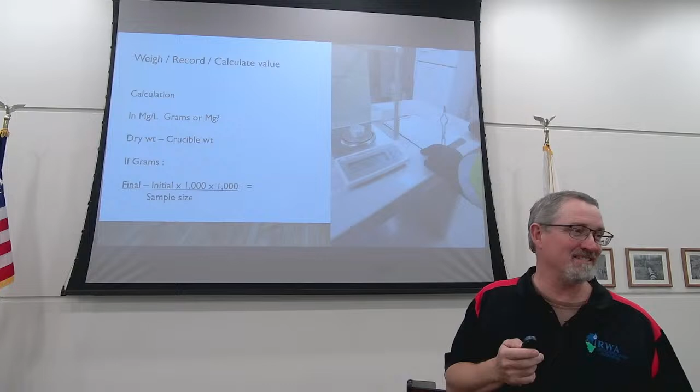So, any questions? I had a lot more questions last week. Why didn't you want to let the filter dry overnight? I know that's not the standard method.

Yeah, it's not in standard methods. Do I think it makes a bit of difference? I don't. But for day to day, it all comes down to reportable numbers. I don't know if anybody's read that fine print on the bottom of your DMR, it says, to the best of my knowledge, this is true and accurate, and everything I know is. So when I know something and I know better, most of us as operators, we try to do the best job we can, right?

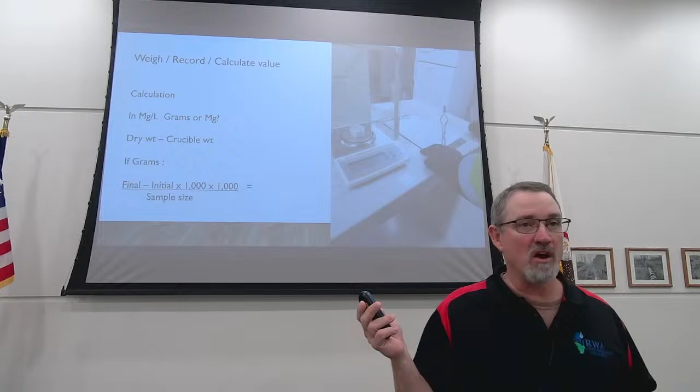If it's the only opportunity that you have because you're doing 50 different things, do I think it makes a bit of difference? I don't think it makes a bit of difference, but the test method in standard methods says dry 1 hour, cool in desiccator for 1 hour, weigh. But I realized I was an operator of a 1 MGD plant. I had 2 operators, we checked lift stations, I had a compost facility, I had 50 things going. So did everything get checked exactly 1 hour? Probably not. So are you using the most current standard methods?

Because I'm sure, the reason I asked, Eric and I just looked this up and it said at least 1 hour. At least 1 hour. Yeah, they're saying they want that crucible to be up to 105 for an hour, is basically what it is. That's why. So, I'm wondering if maybe in a past standard method it did say 1 hour.

I don't see that method has really changed in a long time. At least 1 hour is still, you know, Paul probably knows, everything you read has an interpretation. I won't say that's the gospel, at least 1 hour. That doesn't mean 24 hours, right?

Well, it means at least 1 hour because it has to be in the oven at least 1 hour to dry completely. So if you say at least 1 hour, and you do leave it overnight, are you going to dry and reweigh it at least 1 hour again?

Because you're supposed to. What do you mean? So in standard methods, it says you're supposed to dry for at least 1 hour, then cool for at least 1 hour, then weigh, and then repeat that process.

So if you're taking the liberty to say, okay, I'm going to let that go overnight - yeah, because it's at least 1 hour. That's my argument. We have actually left them in for days, sometimes like Friday to Monday.

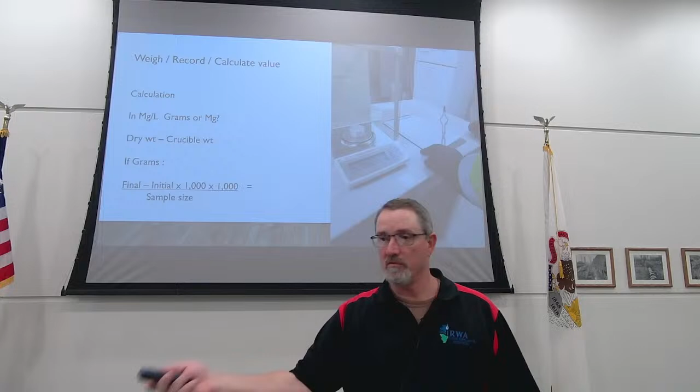So I completely agree with that statement. Yeah, so at PDC, what we did there, what we were required to do is we had to weigh it at X time, and then reweigh it at another X time. I don't remember what the difference was before you could actually record.

Like I said, I've had 35 years of this, and I thought I knew a lot about lab. I talked to 3 different certified labs in my area because we were all inspected, and we always kept in communication to see what they were looking at this year, because every year they'd inspect and key in on something new.

I've learned more in 2 years being with IRWA, learning from labs. I went to these guys, learned something. I went to Beardstown, learned something. I could go to Galesburg and be like, wow, this is something different. There's 50 ways to skin a cat.

It's not necessarily wrong, and if IEPA is fine with it, run with it. If it works for you, run with it, and you think you get good results. I mean, how are your blanks coming out? Our blanks are fine, so that's not my problem.

My problem is that the method says at least 1 hour. So if you leave it in there longer than an hour, you're okay by method. I agree, but the blank would be my indication of whether that's okay.

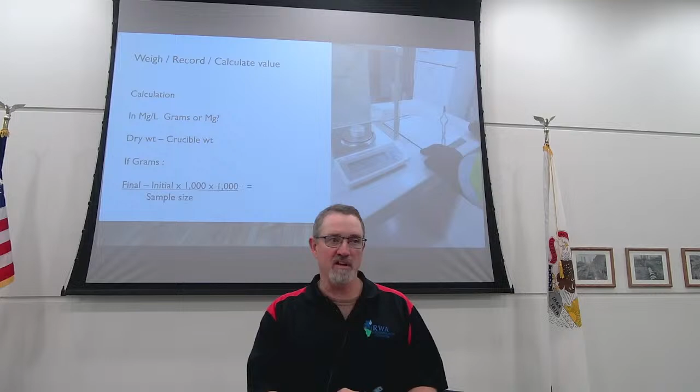Being morphed with TSS, because in a total solids test, when you're doing a sludge sample, you have to dry that overnight or you're not going to get it dry. So I think that's probably where it came from.

But like I said, I would never say you're doing it wrong. I would say show me your blanks are stable. Do you do duplicates at all? If your duplicates are coming out good with less than 10%, and your blanks are coming out good, I'd have a hard time as a lab inspector saying you've got to do it this way. So some of this is the way I was taught, the way I was inspected, and I've very rarely come in and say there's something you can't do. Any other questions on that?

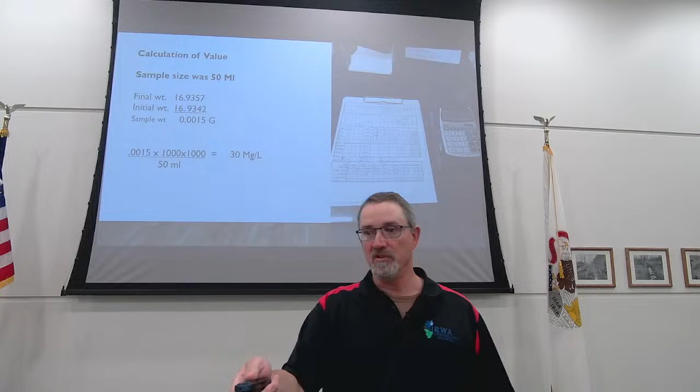So this is the calculation, we already kind of went over this, this is Macomb's bench sheet. One thing they do, which I'd like to throw out there for discussion, whatever their variance is on their blank, they subtract or add that into the weight of their sample. Was that something you guys do? No, most labs don't do that. That's the first time I've seen that. Makes sense to me, I don't see that in standard methods anywhere, but it's interesting.

I found it very interesting. I think it could be very viable, but it's not in standard methods, and they're the first ones I've seen doing that. Once again, I wouldn't say that's wrong, it's just different.

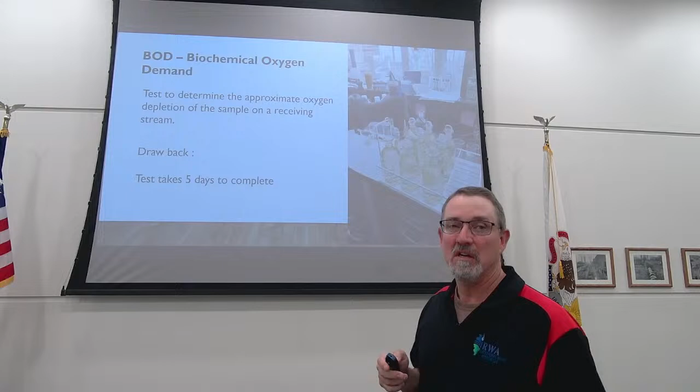Okay, BOD. I swear BODs in my 35 years were more like voodoo than actual testing. Anybody that's done BODs long enough probably understands what I'm talking about. Sometimes they just go off the rails and you're sitting there wondering what happened, because I'm not doing anything different - cleaning my bottles the same way, doing everything the same way. And all of a sudden my 5-day results are creeping up, or there's other checks as well. The big drawback to BOD, everybody knows it takes 5 days later to get the results. So that's what happened 5 days ago. Hopefully all your plants are running good enough that it really doesn't matter - they're putting out good water every day.

So DO meters - for anybody not aware, DO meters and probes have come a long way in the last 10, 15, 20 years. There's what's called luminescent technology, which I'm sure you're all probably using. I've been using it for almost the first year it came out. We started using it in New York, and we had to prove it was as good or better than the membrane technology that was accepted. It was really evident right away that this technology is far superior to the old membrane technology. You can put a new cap on there, put a new probe in service, and have accurate results quickly. Anybody that's run the old membrane DO meters remembers it's just a total hassle - you have to put a new membrane on and it takes a while to settle out. So is anybody still using the old membrane DO meters?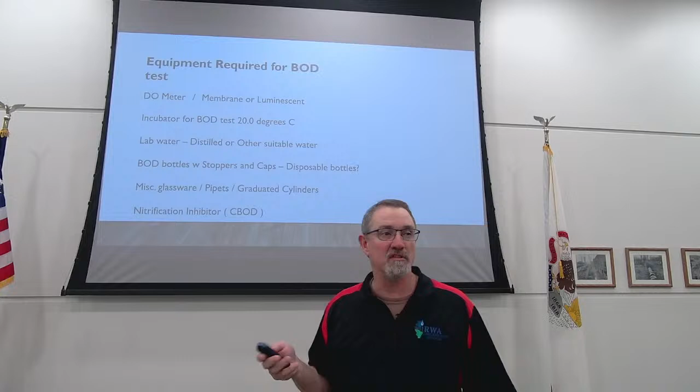I bet you're happy about it too. I can remember years ago we had all these bottles and went to run our DOs, and we had to put a new membrane on, and basically that whole day it wasn't going to settle out and wouldn't give me good results.

So has anybody heard of a Winkler DO titration? I've heard of it but never done it. Basically with a Winkler, you add 2 different reagents, invert the bottle, it'll turn a yellowish color. It'll settle out - it's a very long process, and you have to titrate every single sample. It took basically the whole afternoon to titrate all those samples out, and it was like, you've got to be kidding me. So as soon as I heard about that newer technology, I was jumping on that. So, incubator - 20 degrees Celsius, plus or minus 1 degree.

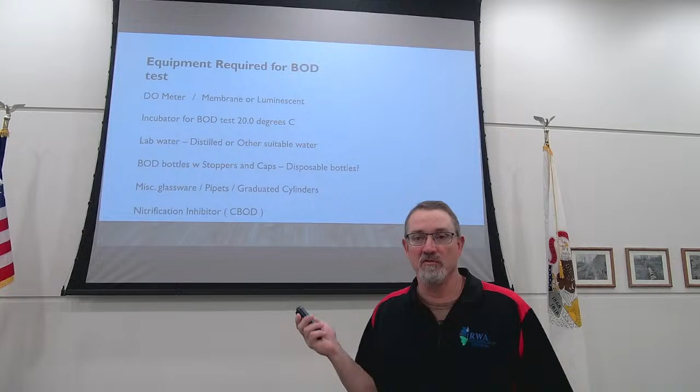Lab water, something I didn't know, which made sense to me, is people use just store-bought distilled water, which kind of baffled me because I never even thought of doing that. We started out with a still for doing distilled water, and those numbers were up and down. We ended up buying a reverse osmosis water system just to get our lab water, which was like $8,000 back in 2000, so it was a lot of money, just to get stable lab water. I wish I would have thought that you could just go grab distilled water off the shelf and say, hey, let's use this. And actually, most of it is pretty good.

Is that what you guys use? We have our own still. What do you guys use? Most of the labs in the state are just using store-bought distilled water, which was like, wow. I wish I would have tried that 20 years ago, because we could have saved a lot of money. If you get a good source of distilled water, that's great. Some people add their nutrient pills right in the jug, so you don't even have to worry about cleaning your carboy. You just mix that up, use it, and throw it away. My lab, we always struggled getting 0.2 less on our 5-day blanks. They were always kind of 0.2, 0.3 just all the time, and we could never really pin it on anything in particular. It was just kind of always floating around being there.

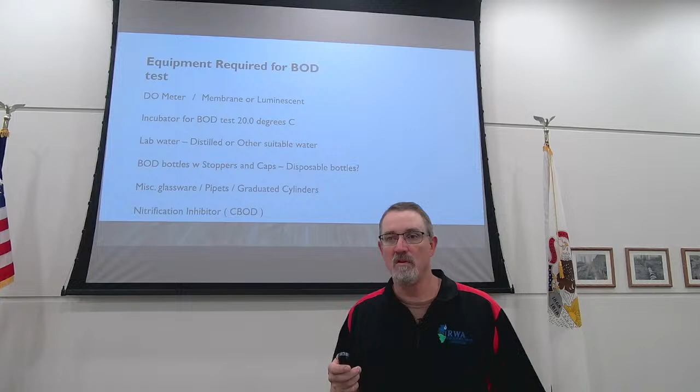Do you guys have problems with meeting 0.2 on the 5-day? We don't typically, no. Interesting that you say that, though. The whole reason we switched to store-bought distilled water was because of our blanks and our water system that we had at the time in the lab. That's where we traced the problem to. So we switched to distilled water. Stills are very, very hit and miss on whether they produce good water or not. It can really make you pull your hair out.

What do you guys use, just a still, or are you using RO? Well, city water has RO, of course, but it's just a still that we have set up. Any issues with the 0.2? No, that's great. I struggle more with meeting that.

The only problem we've ever found with using our own still is most recently with DMR QA, mixing up the dilute for doing the test for ammonia nitrogen. We got 2 failed results, and we're pretty sure it's because it's a copper still. I remember talking to you before about that, something with that copper line still messed something up with the QA. Went and bought store-bought distilled water, came out perfect. Exact same. See, that's why water stills are really touchy. I think it's all got to do with whatever's in the still, and then the feed water, and the cleaning of the still.

I ran a still for the first probably 15 years that I was an operator, and I was like, whoa, what is with this thing? We did a conductivity test. Do you guys ever do a conductivity test on your still? I didn't see that, I don't think that's in standard methods. I don't even know what the reading is in conductivity, I think it's like micromhos or something, 2.0. So you can actually run a conductivity test on your still to see how good that water is, and it was 2.0 mmhos or something like that. I don't remember, I'm not a chemist.

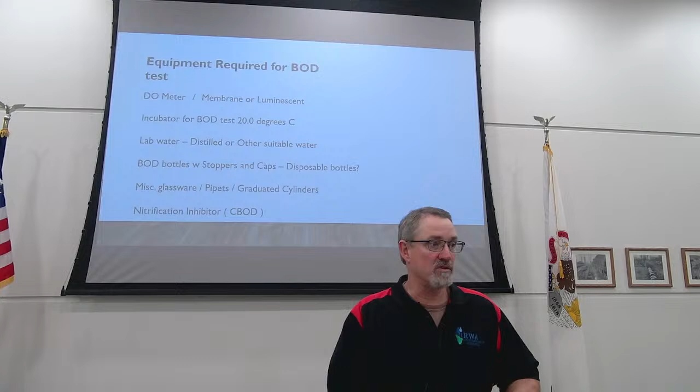But that's how we could tell - that conductivity reading was like one week good, one week bad, and it was really all over the place. So that's a test you can run if you get a probe, and you can watch your conductivity. If it starts going up, you've got to start looking at cleaning your still or something's going on. But the store-bought distilled water is a great option. I wish I would have tried that years ago.

Nitrification inhibitor and CBOD - not in your raw, but in your effluent. You're supposed to be using nitrification inhibitor. Everybody's doing that, I hope.

Dilution water prep - like I said, some people are doing it store-bought, some people are using carboys to make it up. If you're using a carboy, most people are not cleaning that often enough. How are you guys cleaning your carboys? Are you?

Yeah, if you're getting good blank numbers, then do what you're doing. I swear, if you're getting good numbers, just go home and thank God, because you're lucky. I did it for a lot of years, and I know the other labs around our area have always kind of struggled with it. From what I've seen in Illinois, most people struggle getting 0.2 - either that or they're being generous with their numbers.

Nutrients added. BOD is one of those things that's kind of like fecals - you just want to be clean with everything. If you're using reusable glass bottles, just clean them, whether you're using acid or Alconox. If you're using Alconox, make sure you rinse, and then rinse with distilled water before you dry them out.

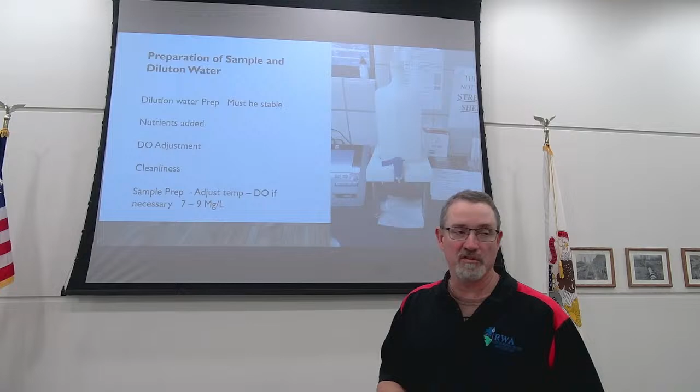This is another thing I'm not sure people are aware of, because I've seen crazy numbers. You're technically supposed to be at your initial DO 9.0 to 7. If you're not, you're supposed to adjust that to make it 9. I've seen some starting numbers of 10. There's a method to do that - I'm not going to get into it, but we got written up... the auditor came in and we had some effluent numbers that were 9.5. She said, well, in standard methods it says 9.0 to 7.0 is what you're supposed to be. I said, well, how do you do that? So there's a way you can adjust that.

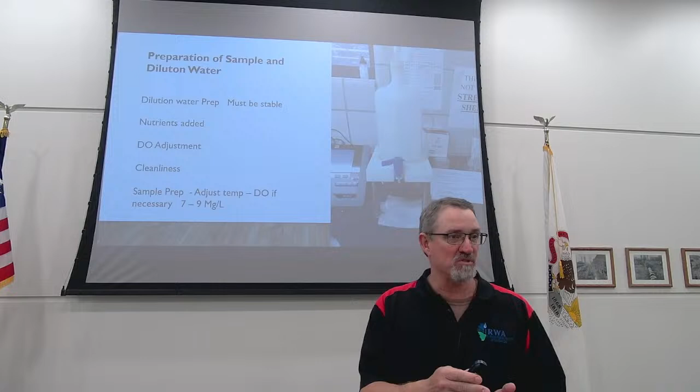So does anybody else have effluent numbers that can be up there? It's very common with lagoon systems that have algae - I didn't even realize that, because I was at an activated sludge plant. The saturation point of air and water - I always assumed it couldn't be higher than the saturation point at that temperature. Well, if you have algae, it can be ridiculously high and super-saturated with air because of the algae. So a lot of lagoon plants will have super high effluent starting numbers, whereas activated sludge plants usually don't have that high.

So, how many people are seeding their effluent? I know you had said that you don't. You guys do? Yeah, so a lot of people in Illinois don't seed. The only reason I would say you should seed is because your DMR QAs tell you that you have to seed those tests. So if you are doing DMR QAs, you obviously want to know how to seed, how to correct for seed, and so forth.

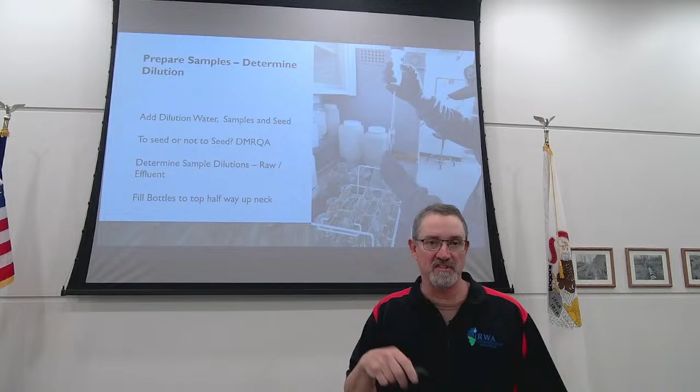I've got two different plants right now that I'm working with on seeding, because one of the guys went to ERTC, and for some reason the instructor said if you're analyzing for CBOD, you have to seed. Right away, when I heard that, I was like, where's that in standard methods? Because I need to read that, I do not see that. I looked through standard methods and I don't see that anywhere. Then after talking to Matt Moss, that's apparently his interpretation, but I've never seen that.

But if you're not used to seeding and you are running DMR QAs, you need to know how to seed, because does everybody know what a glucose glutamic acid check is? Do you guys run those? No? Do you? Yes - so you're technically supposed to be running what they call a GGA, or glucose glutamic acid check, with every batch of samples. Most people don't. They probably don't care out here, I guess.

It's a requirement that you run the GGA check with every batch of samples. That check is basically sugar water. If you take sugar water and put it in a sample without any bacteria, you could technically get no depletion, because there's nothing in there to use it.

It's the bacteria that use the air. So you should be seeding. If you're running that GGA check, you need to seed that sample as well as your others. And if you're routinely doing that, you should probably be seeding your effluent too, since you've already got to do it for your GGA. And when you get DMRQAs, you have to do it for that, or you could be failing.

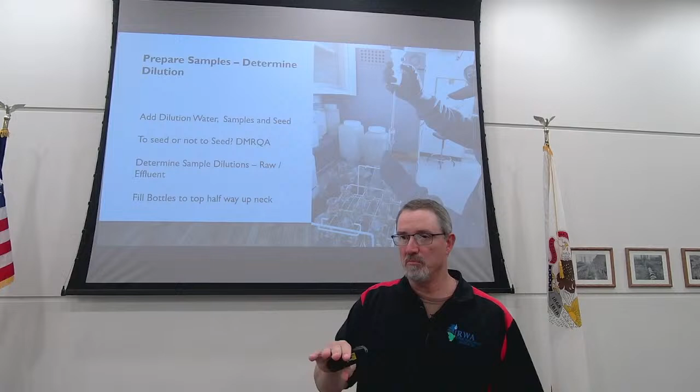You put, I believe it's 150 milligrams, or 0.15 grams. Well, that's the amount you put in. If you were making it up from scratch, we'd buy the reagents - one's dextrose, the other's glutamic acid. You take 150 milligrams of each of those powders, put it in 1,000 mLs, mix it.

Then you take 6 mLs, put it in each bottle, and when you do the calculation, it should come out to 198 plus or minus 30.5. Don't ask me how they get those numbers, but that's what you're supposed to get after 5 days. We buy the little ampules - a lot of people do. You can put it in there, you can do that, yeah.

But what are you checking for? I thought we were just checking for cleanliness of bottles and all this. No, you should get a result of 198 plus or minus 30.5 after the 5 days. But why are you checking that - your distilled water? You're checking your method, you're checking cleanliness, yeah.

That's another thing I struggled with too. We'd have 50 weeks of our G&G coming out fine, and all of a sudden it started going off. What we pinned it down to - if you're using the ampules you're probably way better off, although we never did that. Usually it was the dextrose or glutamic acid just getting old, and a lot of times we'd change it out and it would be okay.

We bought the ampules because when you bought the bigger bottle, you may have cross-contamination with the pipette, and it would ruin the whole bottle of glutamic acid. So you're just taking the vial, putting it in the bottle, and then diluting it.

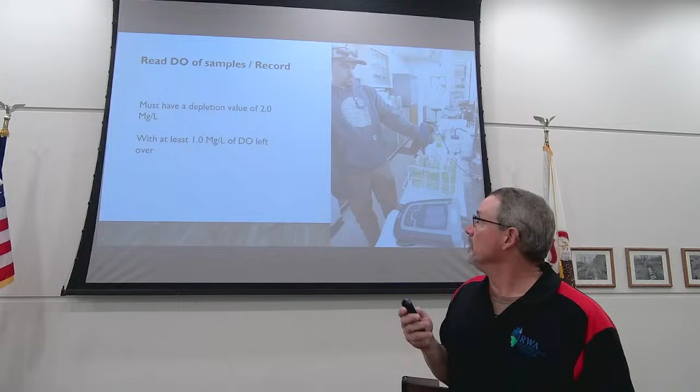This is another thing that's really been loosely adhered to: technically to use a sample, you have to get a depletion of 2, which means if you start at a 9, after 5 days you should have a 7 DO. And you need to have at least 1 milligram per liter left over.

So if you're not in that range, you are not supposed to use that sample. If that's the only one, some people only run 1 effluent. If you get a number outside those ranges, you can still use it, but on your DMR you're supposed to qualify the data, saying that number didn't meet the parameters of the method and it's basically suspect. So you can still use it, it's just not as accurate as it could be.

So if you aren't getting a depletion of 2 on effluent, you can report it as a less than value, because almost everybody doesn't get a depletion on their effluent, right? Do you guys get a reportable number? Some people do, some people don't. Most effluents are reported as less than 4.

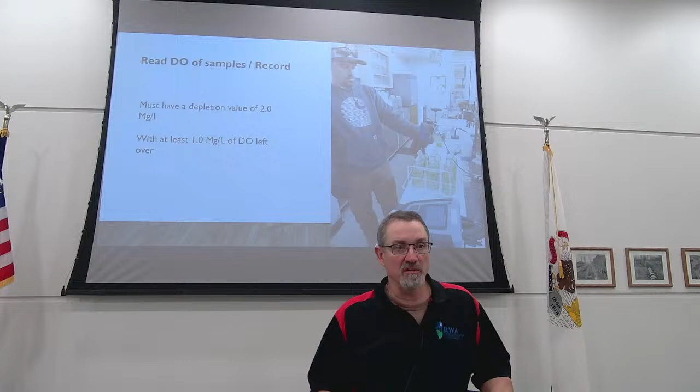Because what they're doing is using a sample size of 150, then diluting it 50-50 with dilution water, so you have a dilution of 2 to 1. If you aren't getting 2, then with the math of it, you should be reporting it as less than 4. A lot of people use 250 instead, and if so, you could report down to less than 2.4. I'll go over that a bit more here.

So this is simple math, without seeding, because seeding is a whole other topic, could almost be a whole hour presentation. Just trying to teach people how to seed who haven't done it regularly is a lesson in futility almost. I've been back to plants 4, 5, 6 times just trying to teach seeding, because I was always taught to use my raws as seed, and trying to determine the proper seed blank strength can be very frustrating.

I had a plant last week at Pittsfield. They did it the week before. Their flow was really dry. I told them to run 20 and 30 seed blanks to see which one would come out. The first week, neither came out, they were both over depleted. Then the following week, they'd gotten 5 inches of rain, and then they didn't have enough depletion. So it was like...

So I'm going to look very closely at teaching people polyseed. I have not used polyseed. Do you use polyseed? I have, and I hate it. Why do you hate it? Every time you make it, it doesn't ever seem to be consistent over time, it just seems like it changes. And as the seed ages, that changes the seed value. I would never use it if I had to. Really? Huh. You just have to learn.

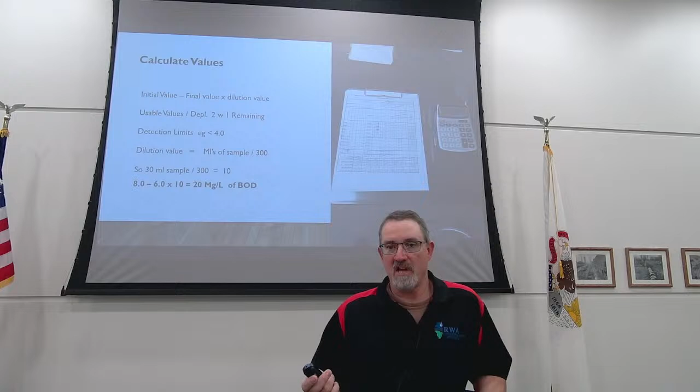If you always do raw and that's the way you're taught, it's not that difficult. But if you're starting from scratch and trying to figure this out, and I'm not actually there to help, I think nobody wants to set up very many bottles in these small plants. They're like, we just don't want to. I set up probably 15 bottles every time.

So we had our blanks, our 10X seed blanks. We did our raw, we'd do 3, 6, 9 raw, and for effluent we'd do 150, 200, 250, and then our G&G. So we're very used to doing a bunch of bottles, so doing a couple more wasn't a big deal. Well, most people only run one bottle for effluent, which I think is a mistake, because if there's a problem with one bottle, you can get false numbers.

You said when you do your DMR QAs, do you do polyseed or do you do raw? Yeah, influent, you use influent. And that's a whole process too. You have to filter it, you have to prep it, you should do it the day before. It's quite a process. So if anybody wants to learn about seeding and how to do that, get a hold of me.

I'm not going to get into fecals. The only thing I'll say about fecals is there's a couple different methods out there. Macomb, some of these pictures are from them, they're doing IDEXX Quanti-Tray, which in my opinion is a very easy method. If you're starting from scratch and you say, well, we got to start doing fecals, then you need to look at Quanti-Tray, or at least keep it in the conversation.

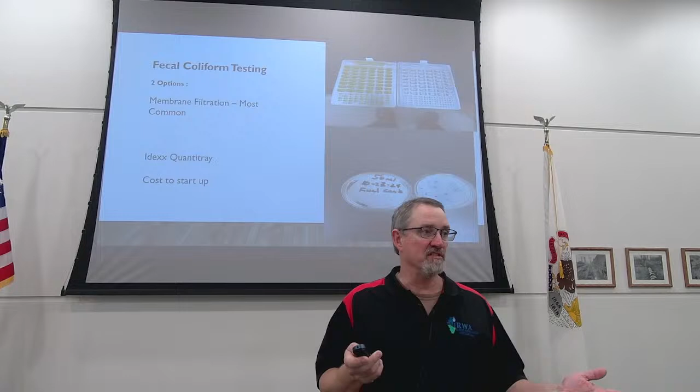Are you guys doing Quanti-Tray or are you doing membrane filtration? Yeah, almost everybody's doing membrane filtration. Which is fine, I just find Quanti-Tray is very easy. There's very little learning how to do it. It's basically add your sample to your agar pillows, shake it, put it in the tray, seal it, read it off. But it does require special equipment—it requires a sealer, which is not cheap. I think when we started up over in Georgetown, they had about $8,000 to $10,000 just in equipment to start up.

So then there is membrane filtration on the bottom. I'm not going to go through that, but this is the chart that you would use to read off the Quanti-Tray. You'd have large cells and small cells. Each one of the ones on the right are large cells, then there's the bottom ones. What's the indicator on the top?

It's a positive indicator, just meaning that there is some presence. Yeah, I had a question about that. Our water plant ran E. coli, which you can use in Quanti-Tray too. Somebody asked me that the other day, and I think it's just an indicator, but I didn't know the answer. I think one of the main reasons is because it's basically a 100 mL sample plus a little bit extra, so when it squeezes out you have that extra, with small and large wells, and everything in the bottom.

Yeah, I've seen probably maybe 6 treatment plants that are doing Quanti-Tray. I think it's great, like I said, if you've already got a water bath—probably your water bath, especially for the small facilities, doesn't fit a Quanti-Tray, so you'd need a new water bath, you'd need a new sealer. So if you're doing membrane filtration and you're happy with it, then you're probably not going to switch to Quanti-Tray.